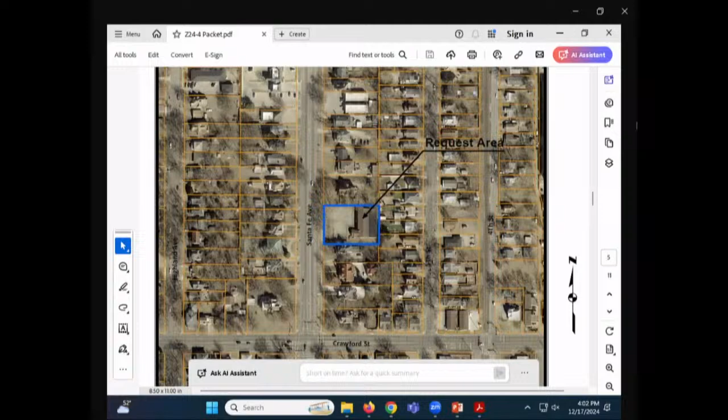Thank you, Dean and Commission. The subject property is 655 South Santa Fe, highlighted on the aerial photo map. It is a former Mowery Clinic medical clinic, north of Crawford on Santa Fe, on the east side. The current zoning map shows it is zoned R3, our multifamily residential district, surrounded by R3 on the north, south, and mostly the west side, with R2 directly to the east. So it is surrounded by residential properties.

Staff has prepared a presentation that we'll share with you as we go through this. Some background: the property was platted in 1912, and the building constructed there was built in 1947 as a church for Salina Bible Church, later used by the Southern Baptist Church before it relocated to Magnolia and Ohio. In 1990, a conditional use permit was approved for a medical clinic on this property, and a CO was issued for that conversion later that year. In 1991, the City Commission approved an ordinance that eliminated medical and dental clinics as conditional uses in the R3 district, because they felt it was not an adequate or compatible use given the intensity typically associated with medical clinics versus medical offices.

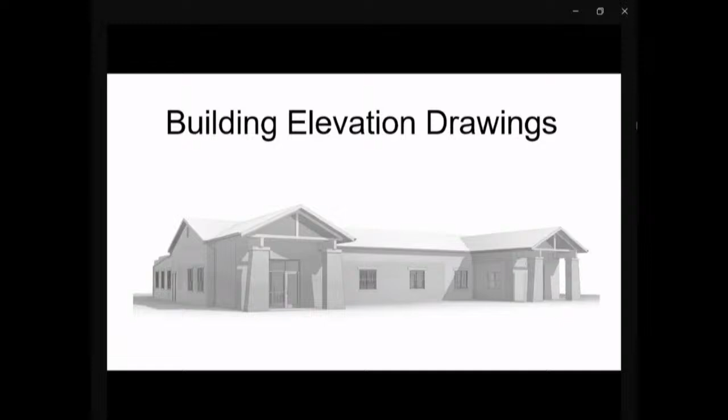Building elevations: here are some building elevation drawings showing what the applicant is proposing. The bump out coverings of the entrance will have stone columns accented by heavy timbers. The existing brick is proposed to be painted, and the roofing would be asphalt shingles with aluminum downspouts and guttering systems to direct water away from the building. Here is a rendering facing west, facing Santa Fe.

Here's another view showing the vertical stone columns and heavy timbers that create the covered entrances. The south entrance would be the entrance to the proposed dental clinic, and there is leftover space that the applicant is proposing to rent out and lease to a second tenant, which would be at the north entrance.

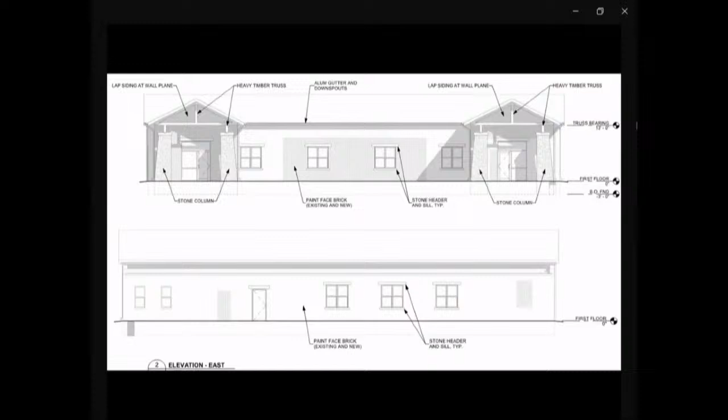Here are views from the north and to the south. You can see again the coverings that are being proposed.

Off-street parking: dental clinics require one off-street parking space for every 200 square feet of their medical office area. In this case, the proposed dental clinic would require 17 off-street parking spaces. There are currently 30 spaces on site, and 2 ADA parking spaces are required, and 2 are also proposed. So the proposed plan meets the off-street parking requirements.

The entrance off of Santa Fe is an existing entrance that's 24 feet wide, which is less than the 30-foot maximum allowed, and 24 feet is pretty standard for a two-way, one-way in, one-way out type of driving aisle or entrance, so that would be appropriate for a development like this.

Landscaping: when the 1990 conditional use permit was approved for the Mowery Clinic previously here for Doctors Hodges and Marshall, 4 shade trees were required in the landscape area. Under current landscape regulations, 2,025 square feet of front yard landscaping is required, and under the plan, 2,250 square feet is existing. There are 3 trees that have survived and are existing. One of the originally planted trees died and was removed, and will be replaced by a maple tree, so there will be 4 shade trees with the proposed plan.

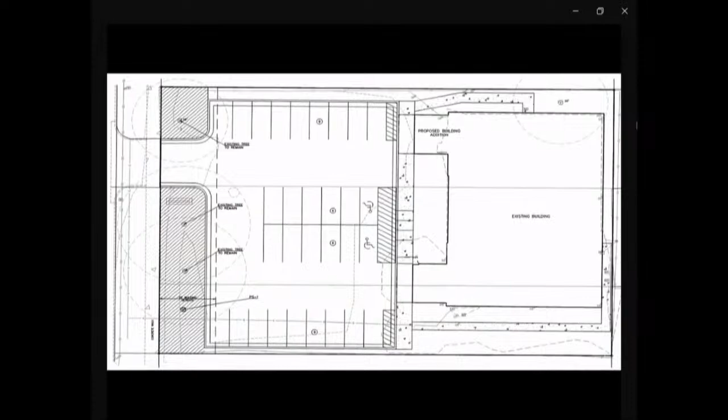Signage: the C1 district would allow for a single freestanding sign not to exceed 32 square feet, as well as a wall sign of 32 square feet. So we would have that as a potential condition that the Planning Commission could approve.

We did note a few questions or clarification items that we would ask the applicant to help us with. One is the proposed exterior colors - the plans show the existing brick would be painted, but we're not sure exactly what the exterior colors would be. Number 2 is the screening shrubs we mentioned, whether the existing shrubs will be retained or replaced with new ones. Also clarification on the trash refuse and how that will be handled. And elevation drawings of any proposed signage, if there were plans for new signage and what that might look like.

Should the applicant provide sufficient information regarding these clarification items, we do believe that the plans demonstrate satisfactory quality of design and compatibility, and meet the development criteria of attachment 7.

So we do have the following alternatives. You could recommend approval of the proposed site development plan subject to any conditions you feel is appropriate, or subject to certain revisions or corrections being made. You could recommend denial of the proposed site, citing the reasons thereof, or you could postpone consideration if additional information or changes are needed.

We do have a number of potential conditions that we can go through. One is that a final site development plan be submitted that reflects the plans being approved. Number 2, construction and use of the property would conform to the International Building Code. The proposed building should be constructed with gutters and downspouts to effectively direct water away from the building and away from the neighbors and towards Santa Fe Avenue.

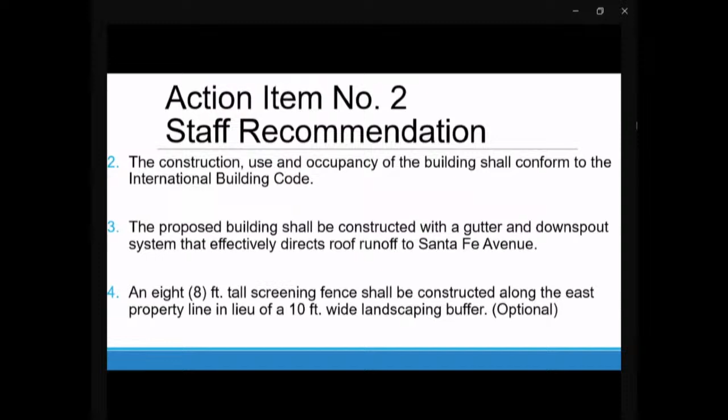One item we put in here as optional, and it's really up to you, is an 8-foot tall screening fence shall be constructed along the east property line in lieu of the 10-foot landscaping buffer. Staff did receive a call from a neighboring property owner to the east that felt that an 8-foot fence would be helpful, so that's an option you might have as a condition of approval.

The applicant should submit a site lighting plan and fixture cut sheets to make sure any exterior lighting is downcast and isn't going to spill on the neighbors or adjacent streets. Number 6, the project shall be completed in substantial conformance to the approved plans. 7, a building permit shall be obtained within 18 months. And 8, that all requested revisions shall be made to the site plan and landscape plan prior to the city commission consideration of the site plan.

So any correction items or anything you feel needs to be adjusted or amended will need to be done before we take this item to the city commission. We also have a condition that if you feel additional work is needed for the site to be in conformance to attachment number 7, you could give guidance as to what revisions are needed in order to conform to the surrounding area. With that, staff will take any questions you might have.

Thank you, Dustin. Commissioners, do you have any questions of staff?

Dustin, could you refresh my memory, how long has that property been vacant? To be honest with you, I'm not 100% certain. I know it's been a few years, but perhaps the applicant would know the specific date. Thank you.

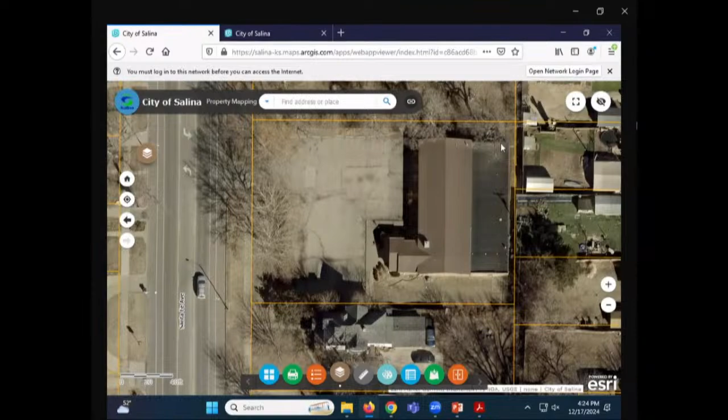Bob Mueller. How are you guys?

When that windstorm came through, it blew half the fence down. That might be part of the issue, why they want a fence back up, but they just left it in ruins. I went in and cleaned it all up. So half the fence is down, half is still up, but it's in disrepair. It needs to be redone anyways.

As far as the occupancy, I think it was probably at least a year before I bought it. I bought it in '21, so October of '21, around that time. That's the ballpark timeframe I have.

Thank you, Mr. Mueller. Are there any more questions of staff before we move on? Is there anybody online? We do have the project architect online, and we also have our student representative, Mr. Hanson, online as well.

Mr. Mueller, do you have any more comments for the commissioners other than what you've already shared with Dustin's presentation? Nope, I'm just here to answer any questions you might have for me. Commissioners, do you have any questions of Mr. Mueller?

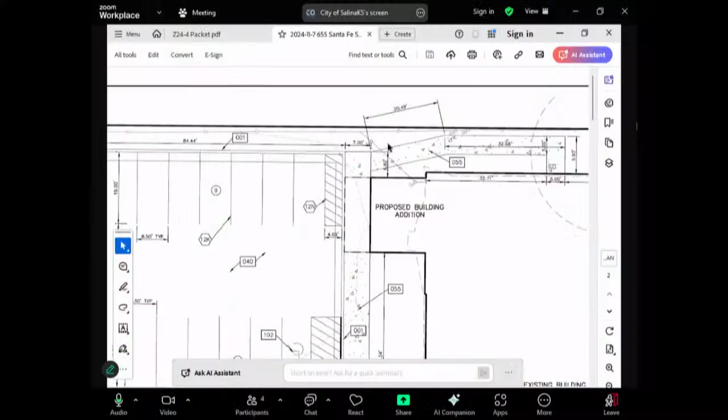Can you pull up the map, Dustin? Yeah, that's what I was thinking of. I'm pulling that up now, Bob, so you can point that out. Is it up towards the building somewhere? Yeah, it's right there. Currently it sits back where it's marked, to the right. Right there is where it currently sits, so we'd bump it out and have it fenced in with the rest of it.

When you say bump it out, what do you mean, more to the north? To the west, because they can't drive the truck back in the back with the proposed addition where it currently sits. So we'd just move it out at the end of the parking lot, but it would be completely fenced in.

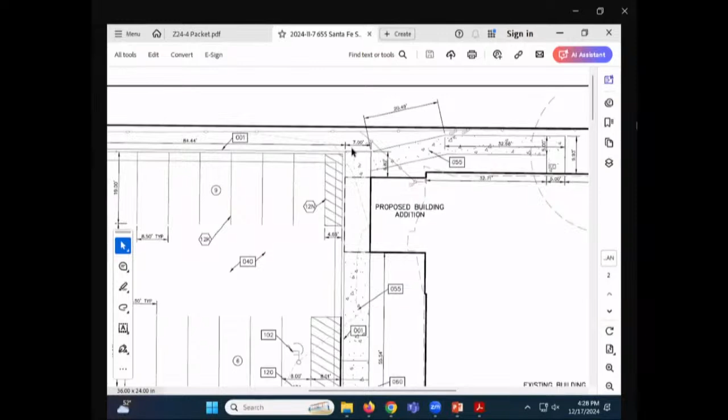Bob, have you settled on a building color yet? It's gonna be neutral colors, probably black trim, dark browns, natural wood-like colors, even though it'll be brick, but nothing bright orange or pink. My current building is gray with white trim, so it's not gonna venture far from that.

On the signage question, I can pass this up to you. This is my current sign, it's not going to be much different than that. Actually, that's my current logo, we'll do something similar. Once we have the actual design and everything, we'll run it through the committee again to get approval for the actual sign.

Landscaping plans, anything? What's there up against the building, we're gonna redo the landscape there for sure. Keep the north, east, and south grassed, with the landscape around the west side of the entrances and that sort of thing. The front area between the parking lot, we're gonna clean up the trees and the bushes. You're gonna keep the bushes? We'll keep the shrubs. If it's dead, we'll replace it.

Just this last year, I had them clean all that out and remulch it. So we'll probably put some landscape borders in and that sort of thing. That's my plan.

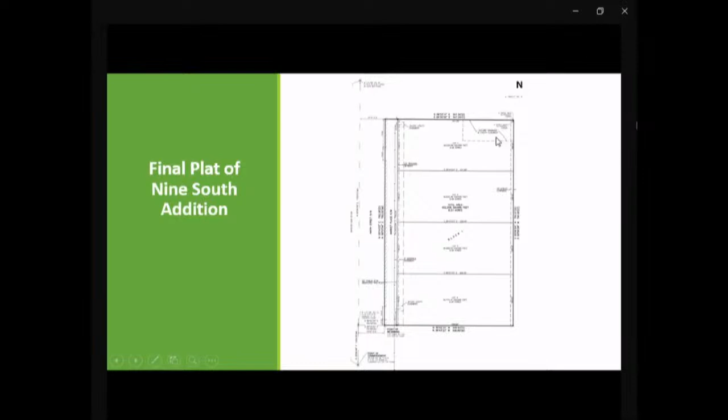So the nature of today's request: 9 South Development LLC is proposing to reconfigure the plat of this property to a layout more conducive to the planned development for a commercial retail shopping area. The proposed replat would consist of 7 commercial building sites, with a separate lot for a stormwater detention pond also being proposed. Your role in this case is to determine that the lots in the proposed replat are all developable and that the replat will meet the city's subdivision regulations.

On the screen, and also in your packets, is the proposed replat. As you can see, there are 7 lots - 1, 2, 3, 4, and then 3 on the backside. This lot 1 is where the drainage pond is located. On the original plat it was a drainage easement, and they're proposing to put that in a non-developable lot called Lot 1.

A couple of notes on the replat: since the infrastructure was put in, there are easements throughout the proposed replat. Lots 4 and 6 have a 20-foot easement that runs toward the back of them but splits the lots. Lot 3 has a 50-foot utility easement that could provide challenges for the development of that lot specifically, but we wanted to bring that to your attention. The other thing to note is lots 3, 5, and 8, located east, do not have frontage on Marketplace.

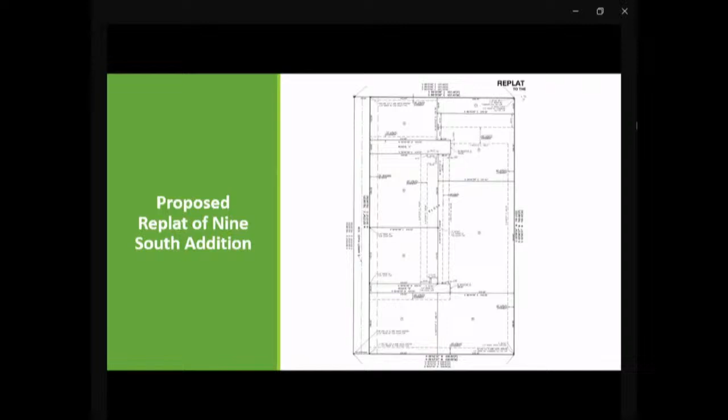Section 3610 of the Salina Code states that if the Planning Commission finds that particular hardships or practical difficulties may result from strict compliance with the subdivision regulation, it may approve variations or exceptions to the regulations so that substantial justice may be done and the public interest is served.

We wanted to bring these 4 criteria to your attention. The Planning Commission shall not approve variations unless it makes findings based upon the evidence presented to it in each specific case. So those 4 criteria are: the granting of the variation will not be detrimental to the public safety, health, or welfare, or injurious to other property.

The conditions upon which the request for a variation are based are unique to the property. Because of the particular physical surroundings, shape, or topographical conditions of the specific property involved, an extraordinary hardship to the owner would result. And, the variation will not in any manner vary the provisions of the zoning regulation, ordinance, comprehensive plan, or official street classification plan.

So staff's analysis of this variation request: the 9 South Addition has frontage on the west side of the development along Marketplace. That stretch of Marketplace was completed along with the previous plat. There is no access to the property from the north, east, or south. The existing platted lots have frontage on Marketplace, but are long, skinny lots not conducive to the type of development the developer is looking to do.

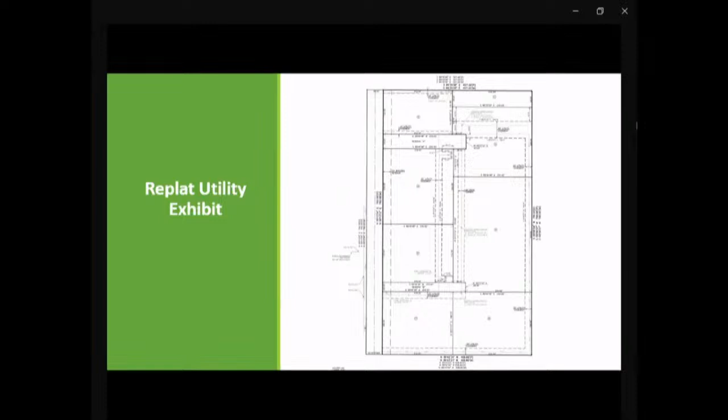In this case, the developer's designers are providing shared access through Reserve A and Reserve B. The reciprocal easement agreement, attached at the end of your packet, specifically spells out how access to each lot will be ensured, as well as how the roadways providing access to the rear lots will be maintained. Staff believes these guarantees are sufficient to avoid landlocking any of the proposed non-frontage lots.

So we can continue. This provides an outline of the public improvements that were made, including the drainage pond, which is on the northeast side of the property. And then the water and sewer lines that extend through these front lots here, and then through the back here. And this is where the 50-foot easement is located for the lot.

Sorry, gotta reorient myself. It's lot 3. And so we just wanted to draw to your attention that when the public improvements were made, before this replat was proposed, development was thought out. So we just wanted to bring that to your attention.

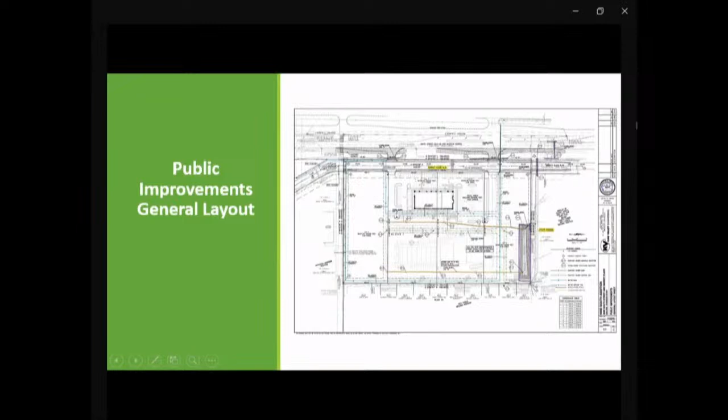So the next slide provides an aerial photo that shows the existing water and sewer lines, and then highlights again the drainage pond located up here. We just wanted to bring to your attention that those improvements have been made and those easements are in place on the current replat.

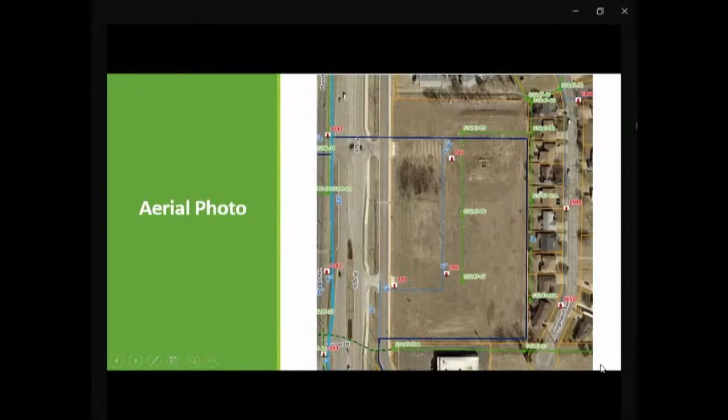So staff would recommend approval of this proposed replat along with the requested variation, subject to certain technical corrections being made to the plat drawing and the following conditions.

Those two conditions are: the property owners shall execute and record the reciprocal easement agreements providing ownership, shared use, and shared maintenance of the shared access drives, off-street parking areas, and shared detention pond area, including any inlets, ditches, or pipelines associated with moving stormwater off the site with the final plat.

And then 2, all technical corrections on staff's corrections punch list shall be made to the final plat drawing and plat certificates prior to recording of the final plat. And with that, staff is available for any questions. The engineers are here and a representative of the developer is here as well.

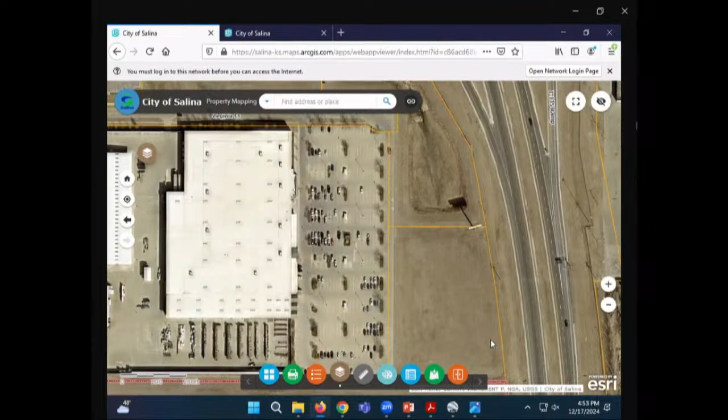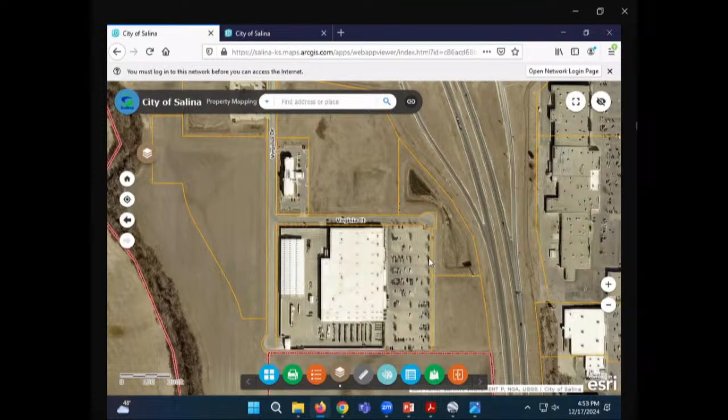And so that is not a public street, and that lot does not have frontage, but similar to what is being proposed here, there are reciprocal easement agreements in that development that ensure that the fire department, customers, and employees can drive across that roadway on Menard's property to get access to that property.

The way it's been done in some other places, if you're familiar with Midstate Plaza, there's a number of outlots that line the west side of South 9th Street, such as the bank and Schlotzsky's and those.

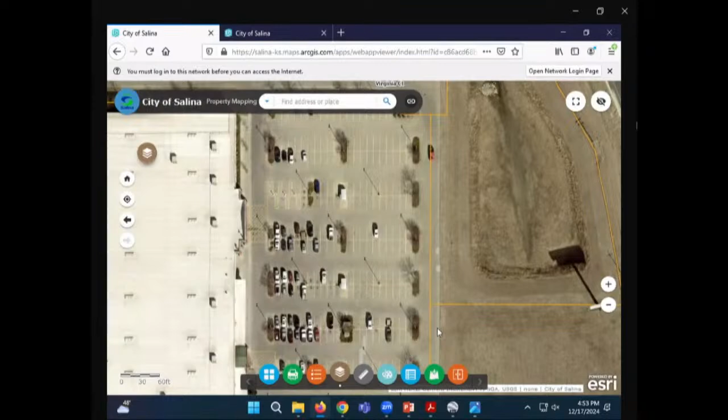So essentially the Midstate main mall portion is a flag lot, and that roadway that comes out to the traffic signal is part of the back lot. As Gage indicated, there are two ways to do it.

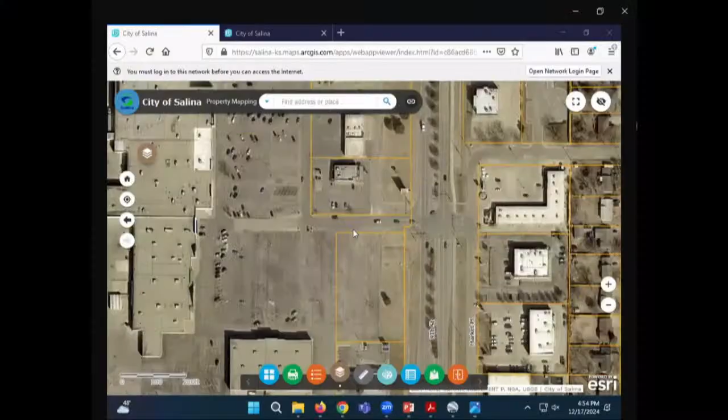One way is to flag the back lots out to Marketplace and have that strip be part of the back lots. The problem is there are two driveway openings and three lots back there, so it doesn't match up perfectly.

The other example was just at your last meeting, with Mr. Bakhta's development up on Bakhta Court. There were two lots: the front lot had frontage on Bakhta Court, and the back lot, because the cul-de-sac didn't extend all the way to the west, had an access easement to get from the cul-de-sac to the west lot.

So our job is to make sure there are access easements and arrangements in place that get recorded and run with the land, because we don't want a situation where ownership changes and developers or buyers can't get legal access to develop the property. The actual details of building placement and access that the fire department would normally look at would be done when site plans are submitted for actual buildings.

Thank you. All right, any other questions of staff? All right, would the applicant or applicant's representative care to share any comments?

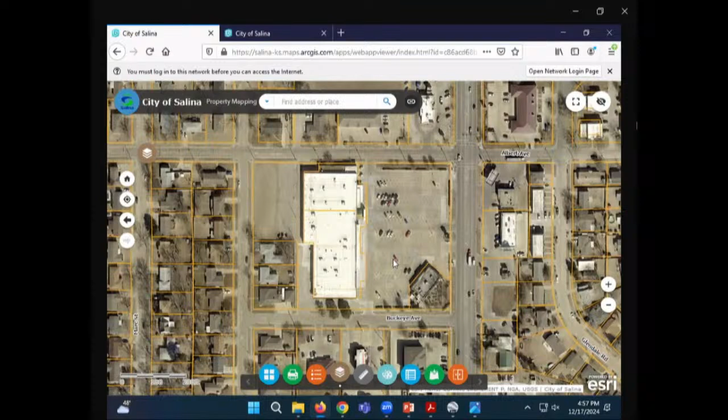Is that size similar to those two examples? It's not similar in that it's got streets on three sides, where this only has the street on the front. But the concept is similar—instead of having designated parking owned by Speakeasy versus Planet Fitness, it's all available for common use and access.

During weekdays when the Ark Church isn't particularly active, you've got spaces used by Speakeasy, and then those might be used at other times by the Ark Church. So from the staff standpoint, we look at it as all community parking for all three uses.

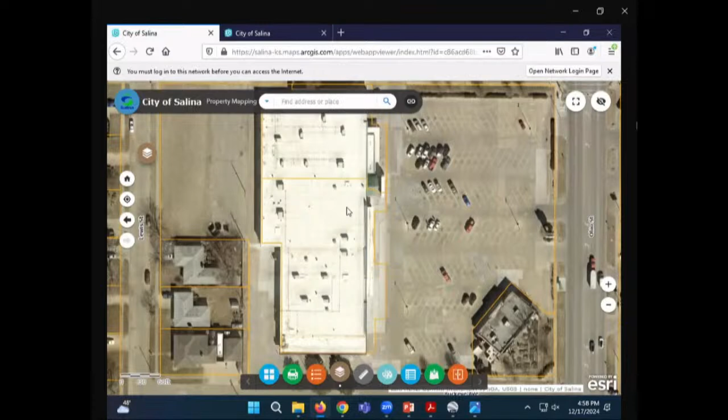If you look at the county appraiser's tax parcels and how they're lined out, they show the outline of each building use—this would be the Ark Church, this would be Planet Fitness, this would be Speakeasy—and the parking lot is its own standalone property shared by all of those entities. It's a common area for the use and benefit of all the developers.

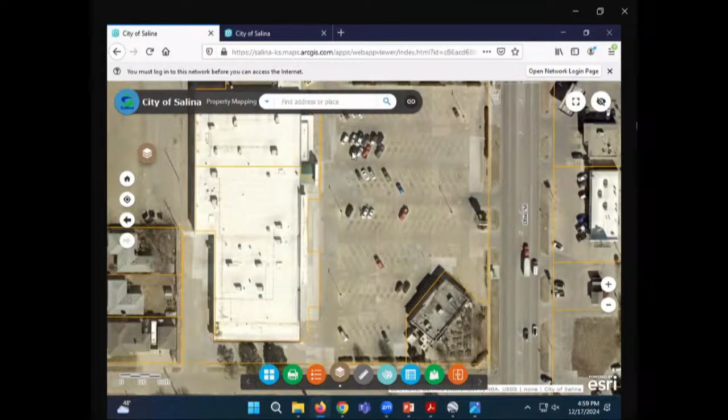So what Mr. Mays has outlined to staff is that Reserve A and Reserve B on the plat will essentially be common area, commonly owned, used, and maintained by all the tenants of the shopping center. This is a good example of the spirit of the intent when we're fully developed—today you'd read the REA, which I wouldn't suggest you do.

Today, we control that until we get fully developed. Then we have an association, just like we have here, where everyone has a voting right, maintained by the owners of the various parcels. Until we get fully developed, we as the developers will maintain that control so we can make sure it's working the way we intend, and we don't have a rogue owner here or there. Then we'll establish the association. We don't want to remain involved in it in perpetuity, but we want to control it to make sure it goes the way we anticipate today. So we'll maintain that control as developers.

Again, if you read the REA, those reserves are maintained by us until we establish the association, which will be managed by the ownerships in their pro rata share of the entire development. That's exactly what we did here. It's just that this is fully developed, so we're no longer involved with it. But it's the exact same thing we did here.

A further example would be out where Kohl's and Buffalo Wild Wings are, where, as Mr. Mays described, the different businesses pay a proportionate share of common parking lot maintenance, detention pond maintenance, and similar things. They all get together and vote on when it's time to redo the parking lot, fix something, or hire a group to take care of the detention pond. So it functions a little bit like a homeowners association, but it's more like a business owners association.

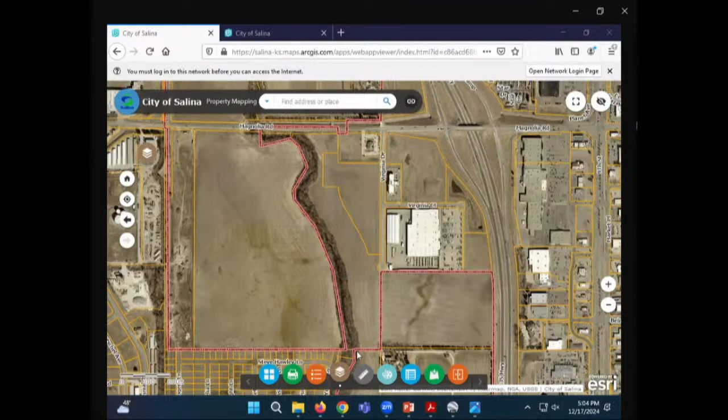Did want to let you know, confirming with Mr. Michelson, if you're familiar with the area out by Menards where we had plans for phase 1 for Salina destination, which is under construction now, they are moving forward with phase 2, directly to the west of that. We anticipate placing that on the February 4th agenda, or advertising it for that time. The concept of what they're doing is going to be a planned development district, similar to what you looked at today with Dr. Moeller's application. A planned development district has two components: the zoning question and what it should be zoned, and then the review of their site development plan and layout.

What they're proposing is a little different concept they're calling horizontal apartments. It will be multifamily apartments, but the apartments will not be connected to each other. They'll be standalone, essentially in rows, not on top of each other, spread out horizontally, with 10-foot separations between buildings in a row. Then at the south end, they do plan to do some conventional apartments. Just wanted you to be aware they're forming up their applications, and we anticipate bringing phase 2 to you at your first meeting in February.

It's moving along pretty fast there on the first phase. Yeah, for some it's not moving fast enough, but we're trying, so.

All right, I guess I'll entertain a motion for adjournment. I'd make that motion. Second. Been moved and seconded to adjourn. All those in favor say aye. Aye. Motion carried. Thank you, Commissioner.